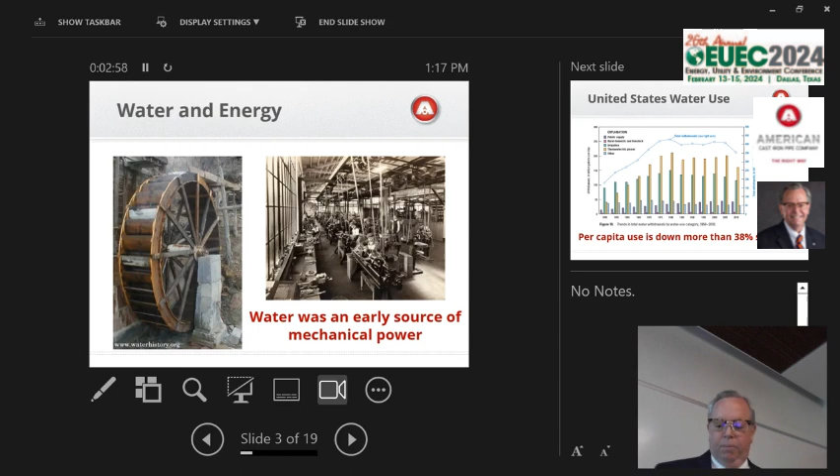Let's look at water use in the United States. Per capita use of water is down 38% since 1980. That's pretty remarkable, I think. There are efficiencies in every use of water across the country. Power generation, home consumption, irrigation, farming, residential lawn irrigation, so many things. You see each of those bars trending down for the most part. The largest use of water is electric generation. 45% of the United States water use is for electrical power generation.

The green bar is irrigation, and that's the second largest use right here. I've got a slide next that talks about how much acreage across the country is irrigated. And then the purple bar here is public supply, and that's where your home residential water comes into play. A typical home with 4 residents would use about 10,000 gallons of water a month. It takes 25,000 gallons of water a month to produce the electricity that home consumes. So 2.5 times the water that the family uses to live in their home is used to provide the electricity that home consumes.

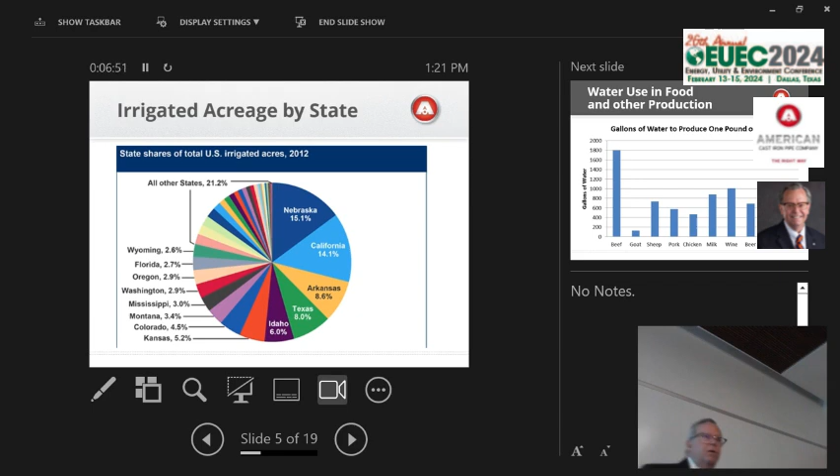And you'll see here on this slide how many gallons of water it takes to produce 1 pound of beef, 1 gallon of milk, 1 gallon of wine, 1 gallon of beer. 1,800 gallons are used to produce a pound of beef. And you think, golly, I didn't know cows drank that much water. Well, they eat grass and they eat hay that grew by using water.

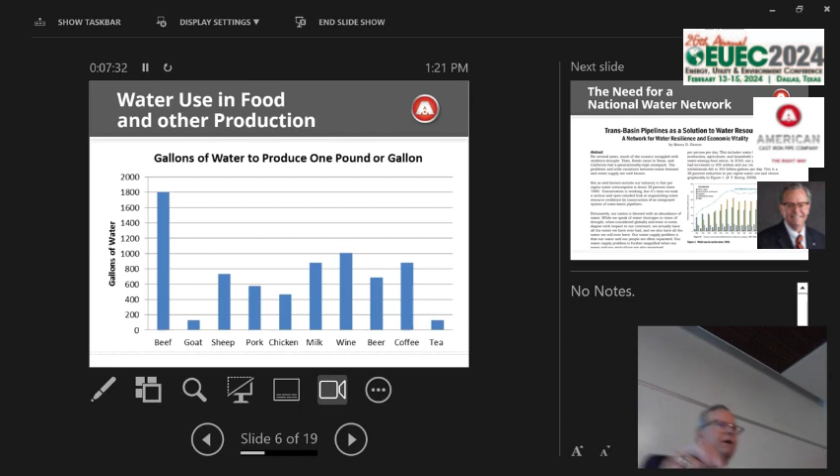So those are fascinating statistics, I think. But remember, we're using the water, we're not consuming it. We'll get it back. So here's the top of page 1 of my paper about building trans-basin pipelines as a solution to our water resources.

You know, they didn't think we could build a railroad across the Rocky Mountains, but we did. We connected the East Coast and the West Coast. We connected agriculture in the West to demand in the East, livestock in the West to demand in the East. And the Transcontinental Railroad totally revitalized and energized the American economy.

We've got an electrical grid across the country where a hydroelectric dam in Alabama can burn a light bulb in Minnesota. We've got natural gas pipelines that are thousands of miles long to move gas from where it is to where it's consumed. Why not do the same with water? Well, there are a couple of reasons, and I address all these objections in that paper.

Water's heavy. It's 8.5 pounds per gallon. And you'd have to pump it up a real high hill to get it to the other side. It's also cheap right now. And until people change their mindset about the value of water, we're probably not going to get the funding to do something like that for it.

You can build a 12-foot diameter pipeline for less than you can build an interstate highway. And yet we've got interstate highways from coast to coast. And there was opposition to the interstate highway idea because a lot of states didn't want other people to have access to their markets through the interstate highway.

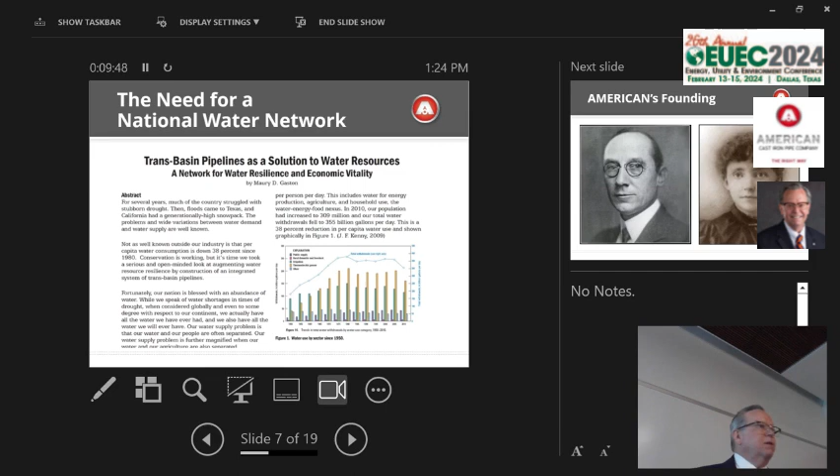So every chance I get to talk about building an interstate highway system to move water from where we have it to where we need it, I take advantage of that.

Now let's talk about the company that makes all these products that supports the water, energy, food nexus. I'm proud to work for a manufacturing company, a company that makes something that you can put your hands on, that takes a raw material and transforms it into a useful product. I'm also proud to work for a company that makes a product that serves essential parts of our economy and contributes to public health, like ductile iron pipe, valves and fire hydrants, and spiral welded steel pipe.

The man on the left was our founder. He had a dream to invest his money in what he called a noble purpose. The lady on the right is Charlotte Blair. She and her brother James Blair knew that Birmingham, Alabama was an excellent place to build a cast iron pipe factory because we had iron ore, limestone, and coal, all within a 30-mile radius.

So the cast iron pipe industry grew up in Birmingham, Alabama at the beginning of the 20th century. Our company was founded in 1905. And there two other iron pipe producers had facilities in Birmingham. Now this is our plant.

It's 2,000 acres. It's 3 miles from east to west. We employ about 1,600 people here. When I started 42 years ago, we employed 3,500 people here. We didn't lay anybody off. It was all attrition and retirement.

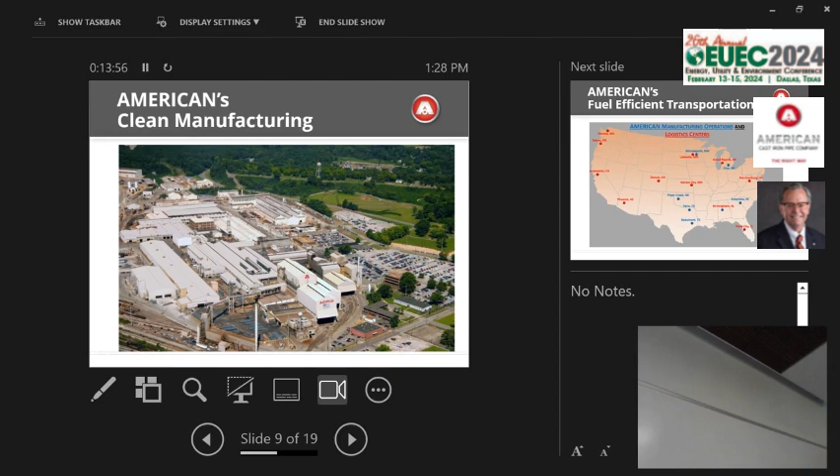Now, right here, a lot of railroad tracks. That's very significant. Every one of these red dots is a depot, a logistics center, a stockyard. We ship iron pipe to those red dots by rail from Birmingham. And we can do it across the entire country because we've got 4 railroad sidings at our facility.

Whatever railroad serves Phoenix, it doesn't serve Massachusetts. It's like the airlines. You don't fly one leg on Delta and transfer to American unless you want to go through all the security and bag check and all that stuff again. You can, but it's expensive and it takes a long time.

Because we've got 4 railroad sidings at our plant in Birmingham, we can ship our product all across the country economically. And we can compete with other iron pipe producers in Utah, California, New Jersey, and Ohio. We've got more pipe on the ground in those red dots than we do at our headquarters in Birmingham.

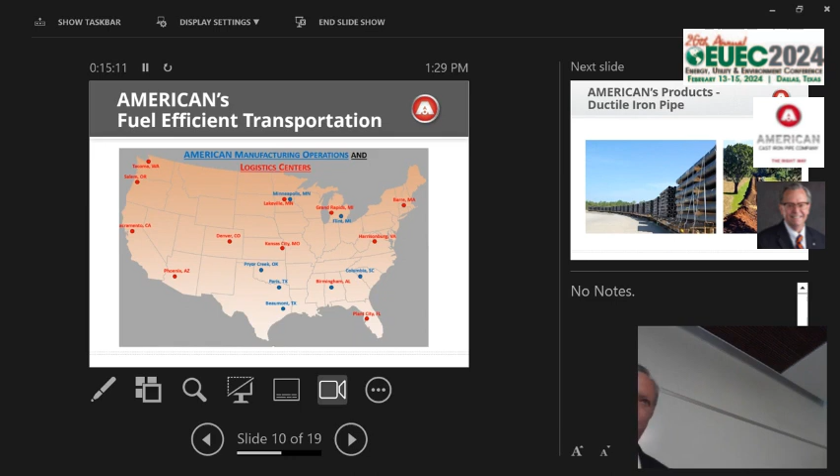And guess what? Rail is the most fuel efficient method of shipping a product. You can move a ton of freight 475 miles on 1 gallon of fuel. Now let's look at our products. This is ductile iron pipe loaded on a rail car to go to one of our stockyards. This is ductile iron pipe next to a trench in Hopkinsville, Kentucky, ready to be installed.

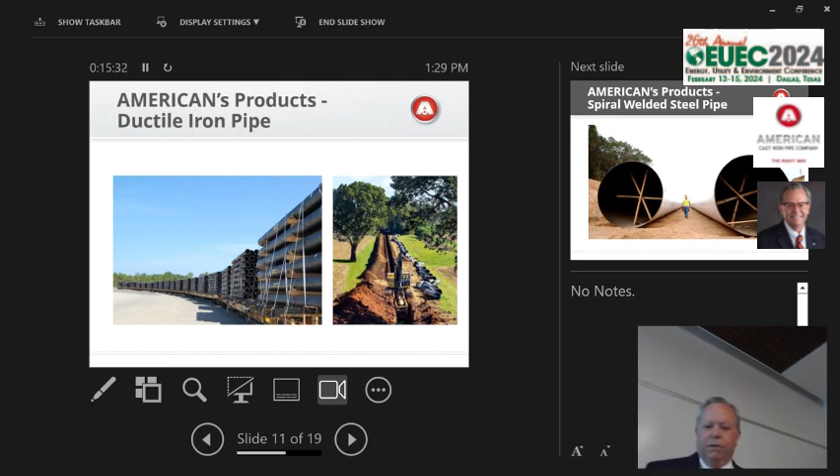Spiral welded steel pipe. You take a coil of steel about 6 feet wide, you trim the edges to make them clean and square, you twist it spirally, you weld it on the inside, you weld it on the outside, you put a cement mortar lining inside and polyurethane coating on the outside.

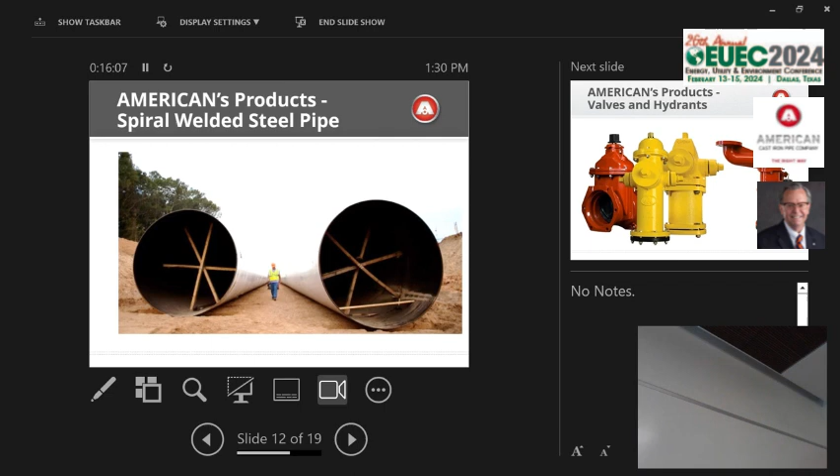12-foot diameter. This is probably a 12-foot ceiling, I'm guessing. It might just be 10. 12-foot diameter. This is a parallel 10-foot diameter pipeline in Arkansas for the Corps of Engineers for a flood control project.

Valves and fire hydrants. These are municipal fire hydrants, which you might see outside this building here. I've seen a couple already. The Darling brand is made in Texas. The Waterous brand is made in Minnesota. We acquired Darling in '69. We acquired Waterous in 1989.

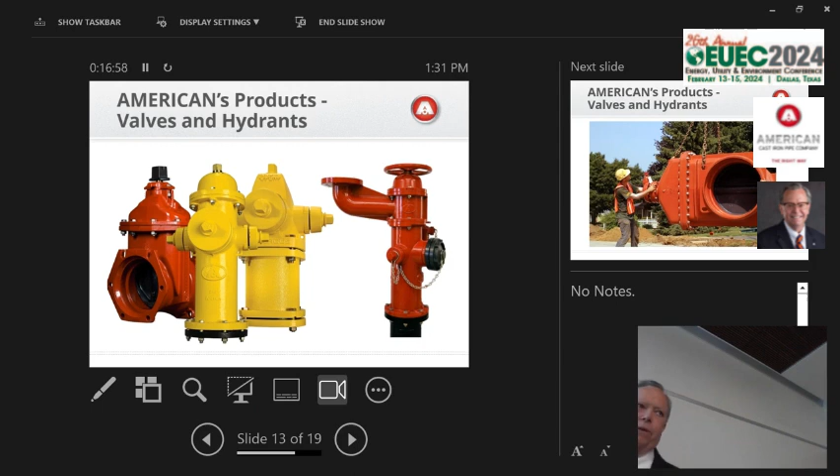This is a resilient wedge gate valve. This is an industrial hydrant. This type of hydrant would be at a refinery, at a paper mill, at any industrial facility. It's got a fatter barrel. It takes higher pressure. You can attach accessories to it to direct the water and that sort of stuff. I included it in this presentation because that's the hydrant that would be used to support and protect the energy industry.

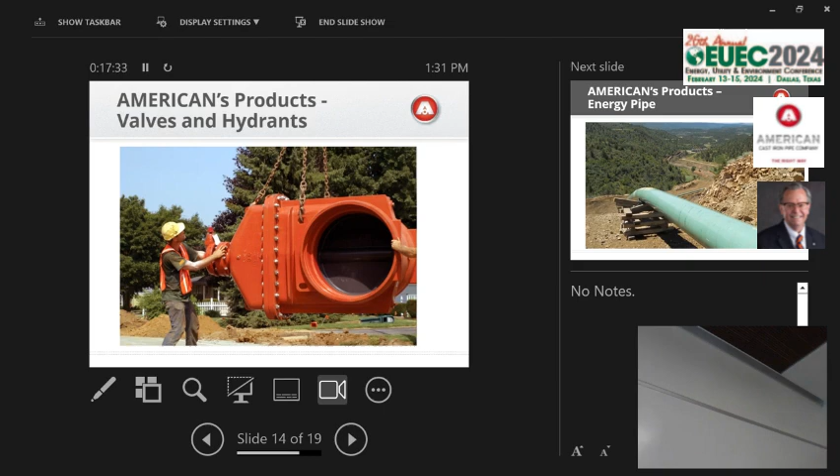This is a 36-inch diameter resilient wedge gate valve, and I'll show that to show the scope. We make these up to 66-inch diameter. A 66-inch diameter gate valve is 13 feet 9 inches tall because you've got to have room up here in the bonnet to bring the gate up to open the valve. That's a smooth port opening here. It's got 1/10 the head loss of a butterfly valve, another energy efficiency.

Another product for the water energy food nexus is our high frequency welded, electric resistance welded steel pipe for natural gas and for oil. That's made in Birmingham. We go up to 24-inch diameter. These projects are typically 200 to 800 miles in length.

And what you see here is an ERW line being installed out west. They place it on these bunks, they weld the joints together, they wrap those joints for protection, and then a machine comes along and picks it up and lays it in the trench. It's remarkable how flexible a steel pipeline can be if it's long enough.

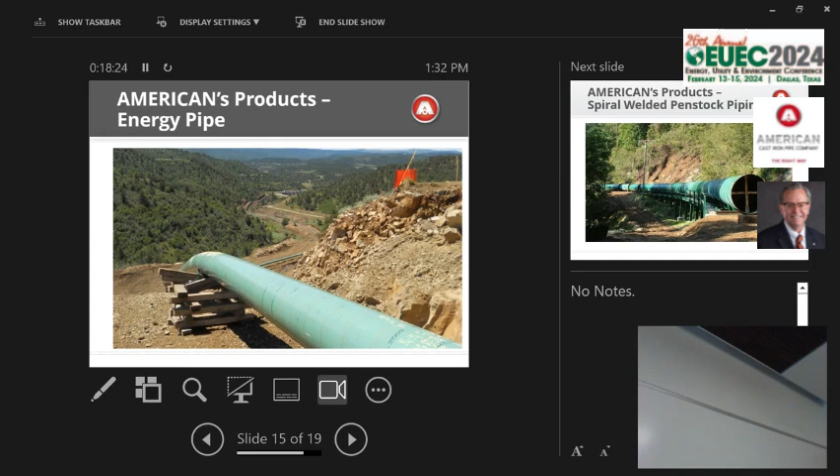This is a spiral welded steel pipe, 114-inch diameter, in the Upper Peninsula of Michigan for a penstock. Penstocks are pipelines that flow downhill by gravity and turn a turbine at the bottom of the hill instead of turning a turbine at the base of the dam, which is up the hill.

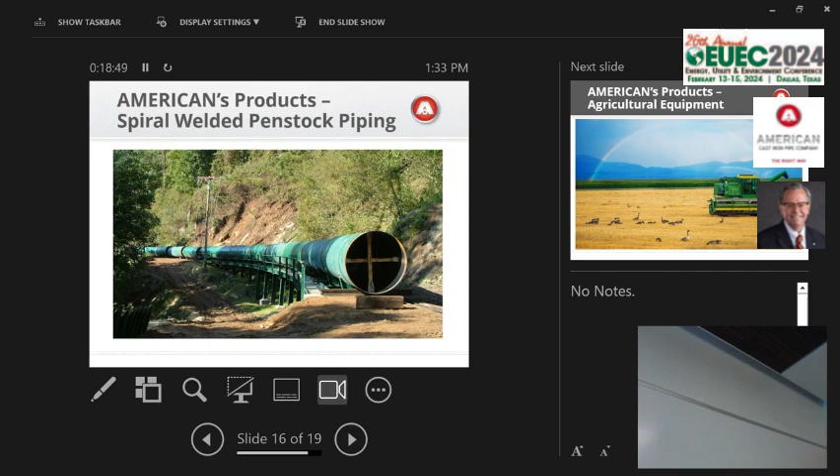And we have an outfit in Pryor, Oklahoma, near Tulsa, called American Castings. I saw a presentation recently by the general manager of our plant. I learned so much. There are probably a dozen parts in this combine, is it? I don't know. That we make at American Castings in Oklahoma. John Deere, Caterpillar, all the agriculture and mining and heavy equipment manufacturers use castings that we make. So this is how we're supporting the food element of the water energy food nexus.

And I will pause for questions. Do you guys work directly with all the gas companies with taking the cast iron out? Like, do you help them? Yeah, he's asking about cast iron pipe being replaced for the natural gas industry, and yes, we work with them some. In fact, I frequent a place in Birmingham for lunch from time to time. Six months ago, I saw them taking out cast iron pipe that we had manufactured. Our very first customer was Atlanta Gas Light. We made the pipe in Birmingham, shipped it to Atlanta, and it was used for natural gas, not for water.